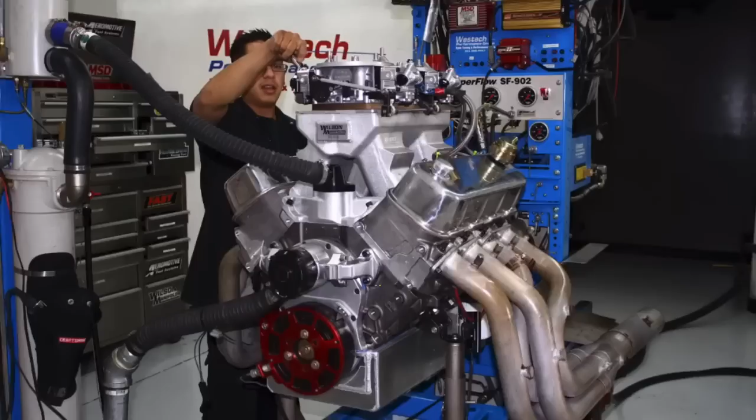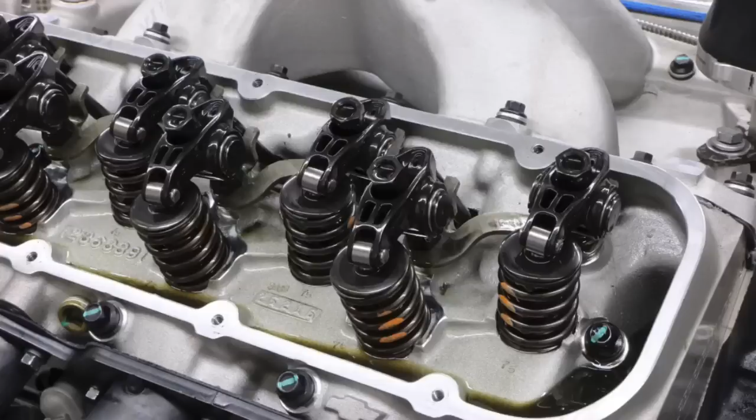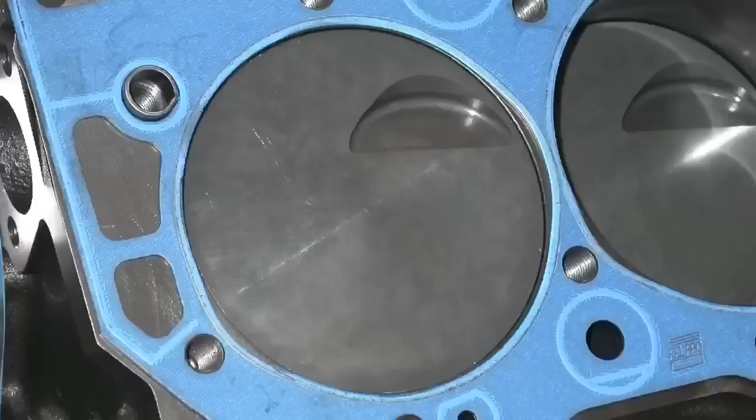Today we're going to take a look at three different 800 horsepower big block Chevy combos, starting off with a low compression 540 Dart SHP short block. Not only did this combination have less than 9-to-1 compression, meaning the static compression was in the 8s, it made over 800 horsepower.

In addition to showing you that combination, I'm also going to show you the test we ran on three different style tunnel rams. Now, stepping over to our next combination, let's take a look at how we take a 496 buildup, a good solid 496, and then make it a great motor by adding a little bit of nitrous.

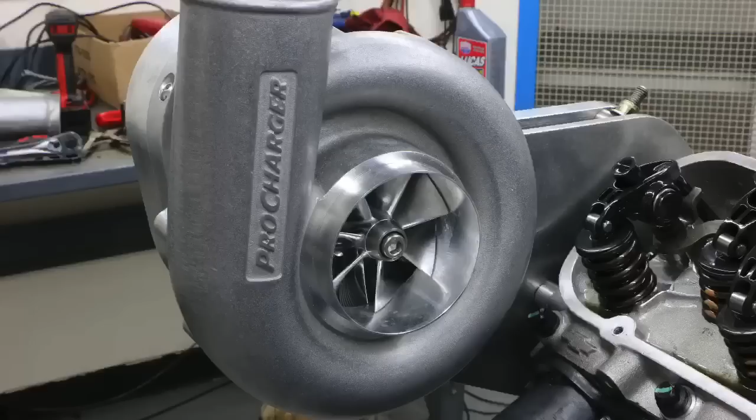The final combination, we're introducing boost. That's a 454-inch ZZ 454 crate motor from GM Performance with a Procharger. What do you think? Let's check it out.

Okay guys, we're going to jump right into our 800 horsepower big block combinations, and we started off with a naturally aspirated version, and then we'll jump into some other combinations.

Our naturally aspirated version started off at 540 cubic inches. In fact, it started off as a Dart SHP short block, forged crank, forged rods, forged pistons, and the Dart block. We're running a set of flat top pistons on this combination with valve reliefs to run much more cam timing, but the flat top piston combined with the 120cc chamber in our Dart Pro 1 CNC ported 335 heads produced a static compression ratio of less than 9-to-1, so about 8.75 to 8.8-to-1, depending on what head gasket and stuff that we use.

But fairly low compression. Despite that, we ran a fairly healthy sized solid roller camshaft in this, and this is a common misconception that you can't run these big cams with low compression. You can. They work better with more compression because compression basically adds power everywhere, but you can still work them fairly well, as we showed in this combination.

So the camshaft that we ran was a 4/7 swap big block Chevy camshaft. Just happened to have one that we had laying around basically at Westech. It was a 742/715 lift split, a 271/280 degree duration split at 112 degree lobe separation angle. And as I said, we installed the Dart Pro 1 335 CNC heads.

We had, we started off, this was a comparison of tunnel rams that we did. So we started off with a Weiand rect port tunnel ram with two 750 carburetors on it. And then we actually stepped up to a Dart tunnel ram with two dominators, and then we stepped up even more to a Wilson ported Dart tunnel ram. And so we'll show the combination of all of those.

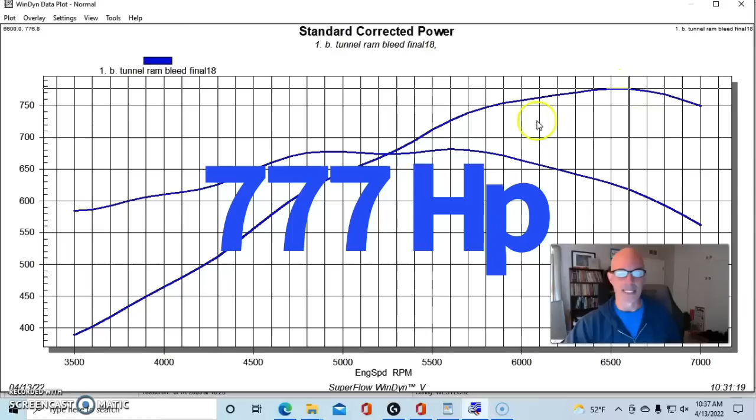So we ran with the Weiand tunnel ram and the two Holley 4150 carburetors on this. This combination produced actually less than 800 horsepower, 777 horsepower, and 681 foot-pounds.

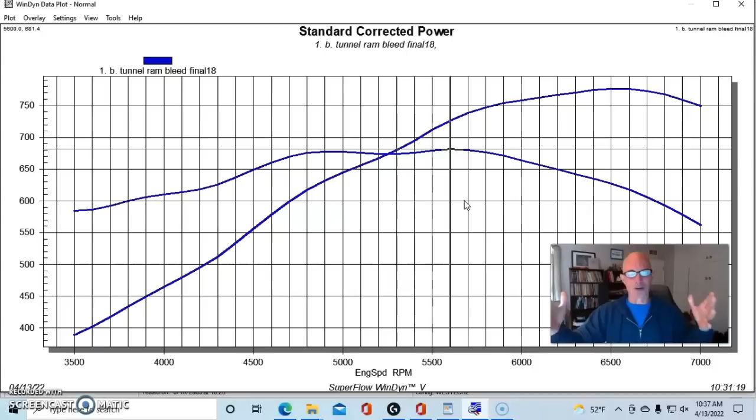And here's what would happen when we replaced the Weiand tunnel ram and the two 750s with a Dart tunnel ram and two 1050 dominators, because, if you're going to have a tunnel ram on there, you got to have two dominators on there on a big block, even a low compression one like this. But here's what happened when we installed the tunnel ram.

So that pushed our power up over 800 horsepower. We were now making 806 horsepower, and peak torque was up to 695 foot-pounds. So it was doing very well, the Dart tunnel ram. You can see there's a little bit of trade-off going on as our sine wave is working there, but basically from 5,000 on out, the bigger tunnel ram and the two 1050s worked out better.

And then what we did was we took that same intake manifold, that same Dart tunnel ram, sent it over to the guys at Wilson, and they did porting on it.

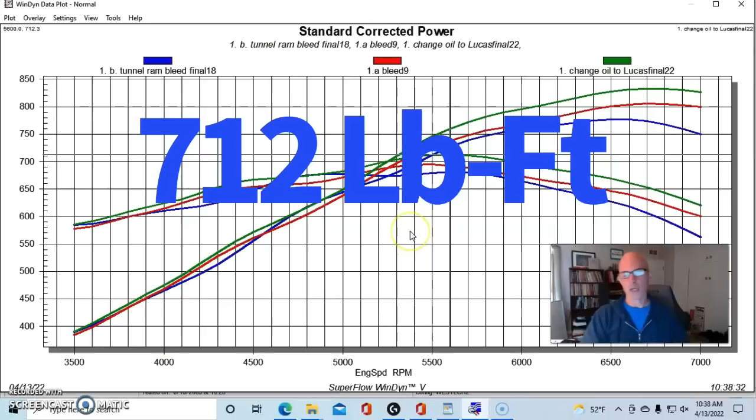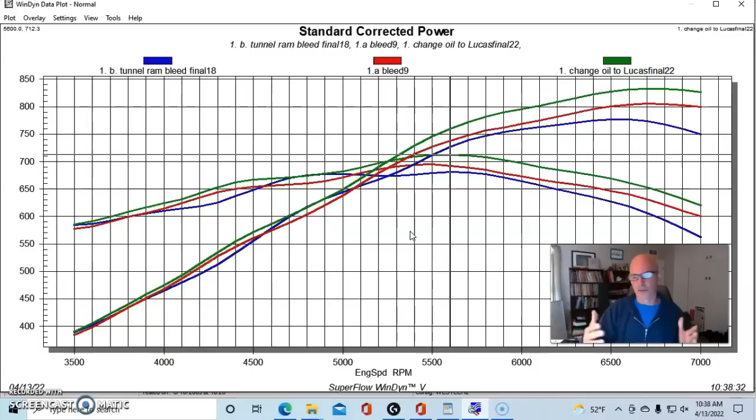And here's what happened. We picked up even more power. That pushed power up to 833 horsepower, and peak torque was up to 712 foot-pounds. So you can see there is power to be had from porting the manifold, and we still had our same twin 1050 Dominators, which was more than enough airflow to support this power level. Even at less than 9-to-1, our 540-inch big block with tunnel rams made good power. Now let's check out combination number 2.

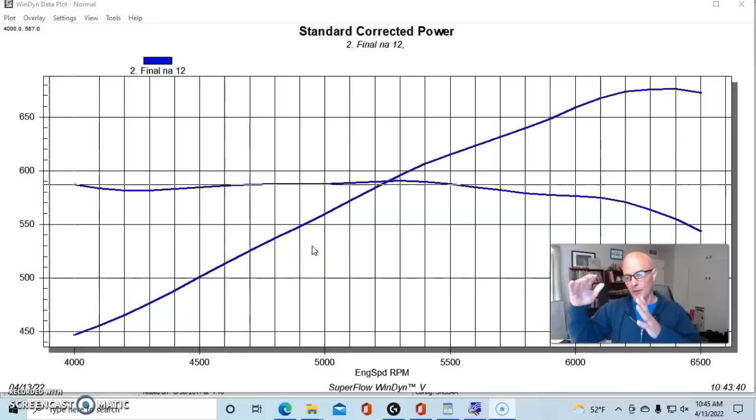Test motor number 2 was also a stroker, but not a 540-inch version, actually only a 496 using a Gen 5 block. We started off with the Gen 5 block, then added a forged Scat crank, and a combination of billet pistons and rods from CP and Carrillo. That produced a forged rotating assembly that worked out very well.

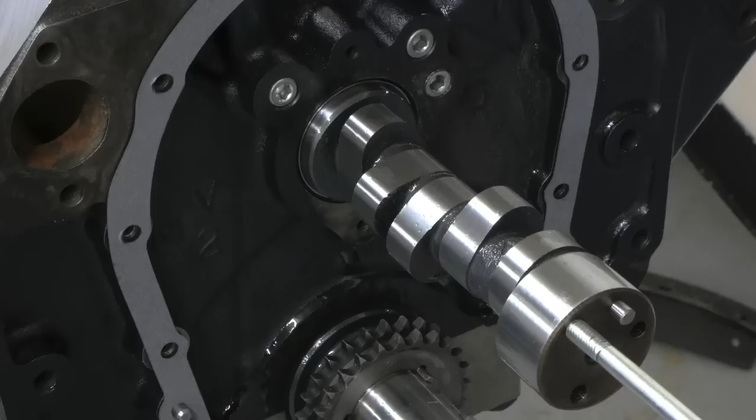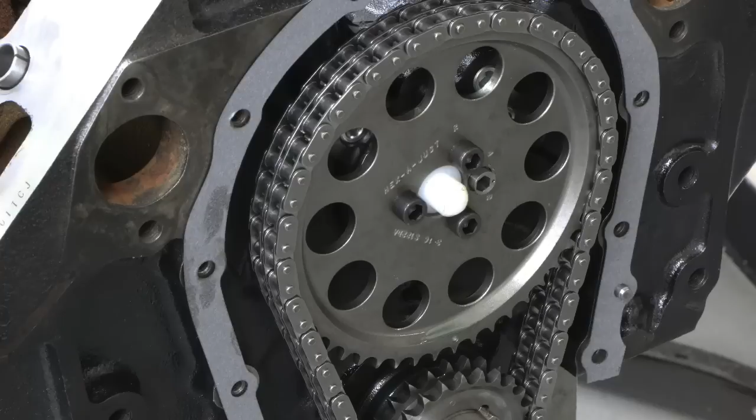We topped that with a set of ProMax CNC ported 340 big block Chevy heads. We also had a much milder camshaft in this 496 than we ran in the 540 - it was the Comp BR300-14, a 652 lift solid roller, but a fairly mild one. It was a 255, 262 degree duration, and 114 degree lobe separation angle. Comp also supplied the double roller timing chain and the solid roller lifters we used, as well as the push rods for this combination.

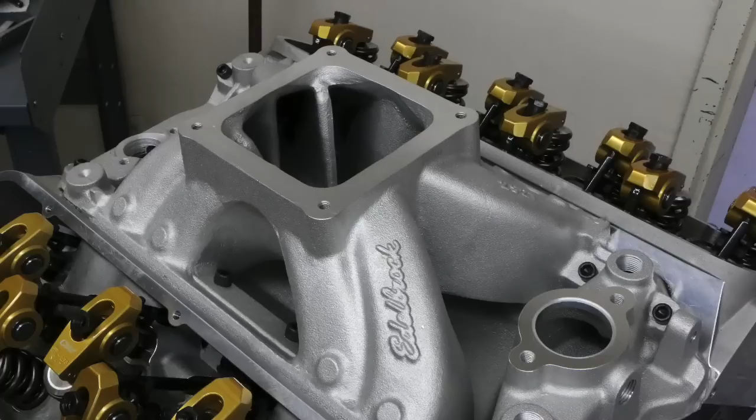This was a 4.31 by 4.25 stroke. We ran an Edelbrock Super Victor intake manifold designed for a 4500 carburetor. We installed a 1050 Dominator carburetor on this and ran an MSD distributor, our long tube headers, the Meziere electric pump, and all of that stuff.

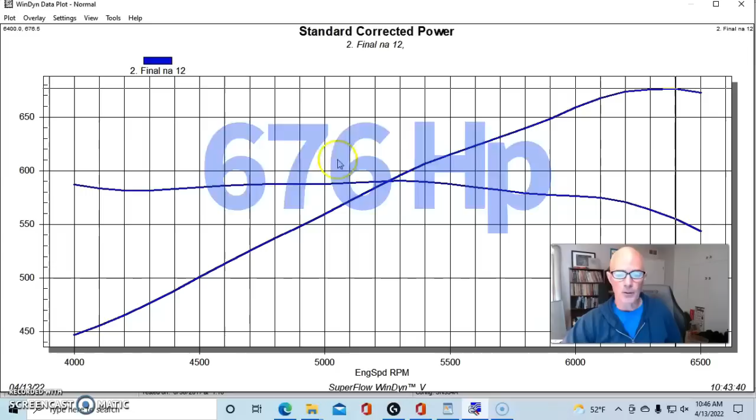Run in this manner, this motor was about 10-to-1 static compression. This thing produced 676, 677 horsepower, and peak torque checked in at 590 foot-pounds, 589.7 to be correct.

And so you might be wondering, well, how do you push this thing up over the 800 horsepower mark? Very easy. We just had a quick shot of nitrous, and here's what happened when we did that.

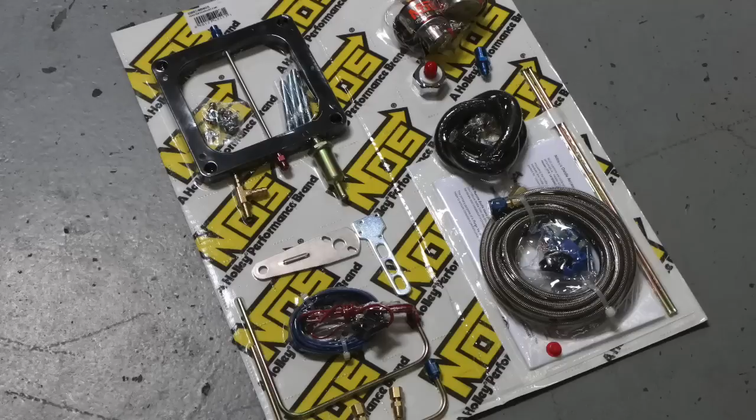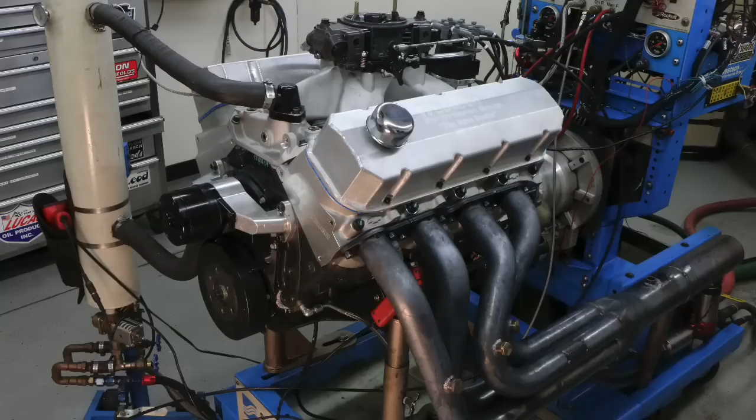Let's get to combination number 3. Our final 800 horsepower combination, naturally we had to introduce boost. So we started off with something very simple, something that's very easy to reproduce - basically a ZZ454 crate motor available from GM.

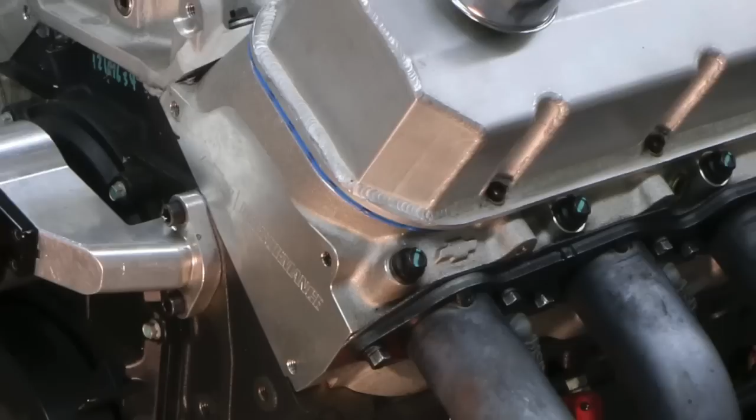Now that combination came with a 9.6-to-1 static compression ratio, so not a ton of compression, but enough to make reasonable power. It had GM aluminum oval port heads, 110 cc's.

We topped it with a Weiand Track Warrior intake manifold and a 950 Holley, an MSD distributor. We had our Meziere electric pump, and then the 2¼ inch long tube headers.

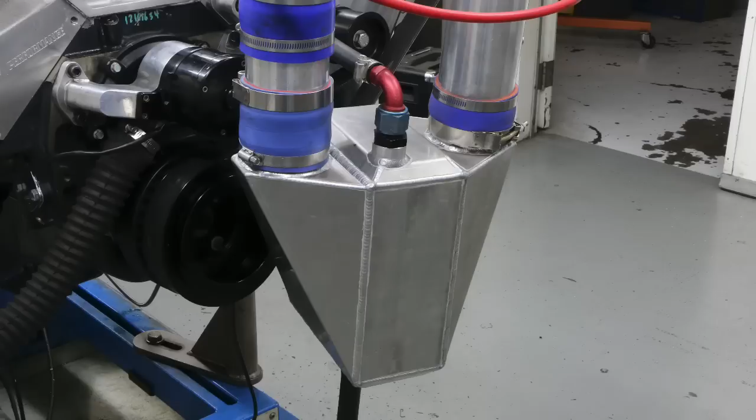We also took the liberty of removing the pan so we could drop it and weld on a bung for our supercharger system drain, because we were going to add a Procharger D1X, and we also ran a P1X on this with an air-to-water intercooler to push the power output of the naturally aspirated combination all the way up beyond the 800 horsepower mark.

We installed the camshaft, which was a Comp Extreme Energy, with a 521/540 lift split, a 236/242 degree duration split, and a 110 degree lobe separation angle.

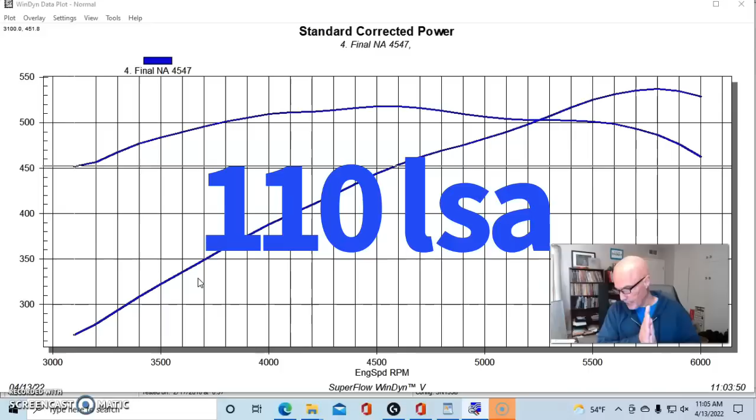When we ran this naturally aspirated, before adding the supercharger, we used a 950 Holley, and it produced 538 horsepower and 518 foot-pounds of torque.

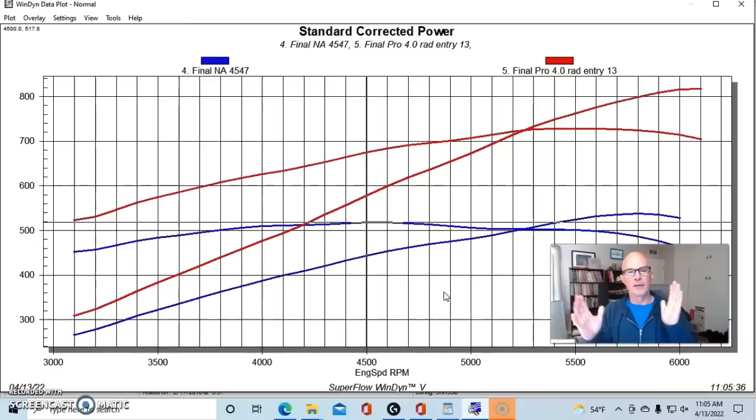But here's what happened when we installed the Procharger. This one was with a D1X Procharger centrifugal supercharger. We also added a radius entry feeding the blower to improve airflow—I'll show you a photo. We had a 4-inch blower pulley and a 7.5-inch crank pulley on this, and we also installed the air-to-water intercooler.

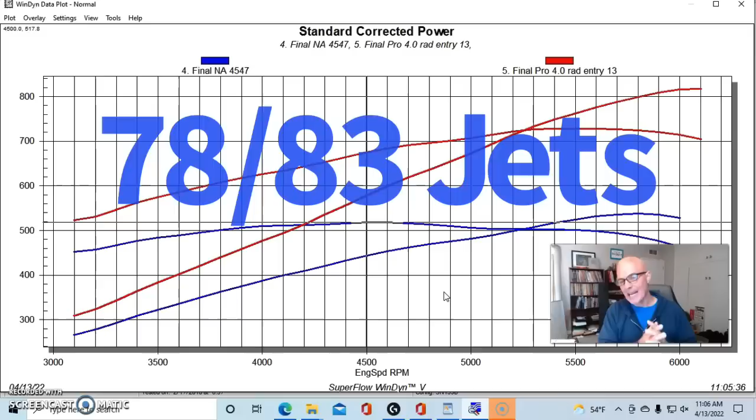We swapped out the 950 Holley HP carburetor and installed the carburetor we run on most of these blow-through applications, a CSU 850 blow-through carburetor, for guys interested in starting their own setup. We had this set up with a 78-83 jet split front to back, and we had a half turn out on both of the boost reference power valves on the CSU carburetor, since those are adjustable.

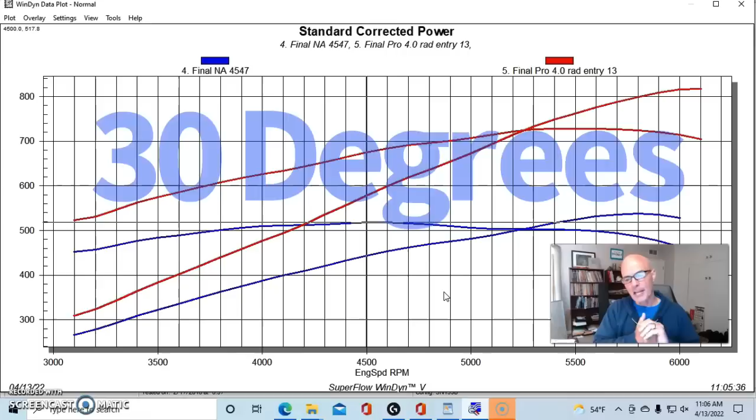We were running 30 degrees of timing, and we ran a mixture of 91 and 100 octane just to make sure we had a safety margin. This particular motor had belonged to one of the editors of the magazine, so we wanted to make sure nothing got hurt on it—that's why we put a little extra octane in there.

So run with the Procharger, the intercooled Procharger blowing through the CSU carburetor, this pushed our power output up over the 800 mark to 818 horsepower. Peak torque was 728 foot-pounds. You can see the blower adds a ton of power. It produced a peak of 7.8 pounds of boost, so very low boost in actuality.

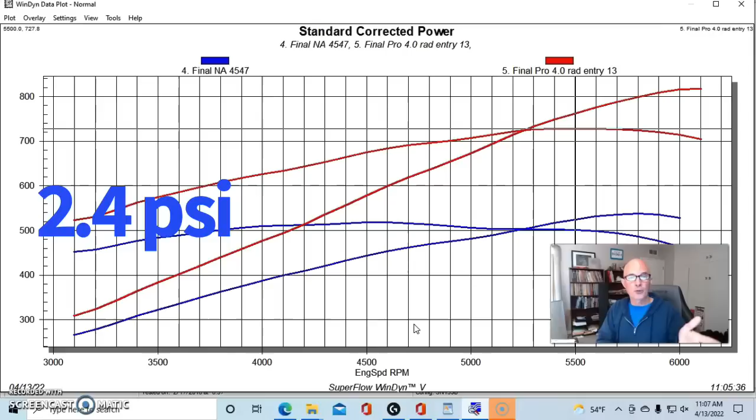You probably could run this thing on pump gas without any problem. Boost pressure started out at about 2.4 pounds down near 3,000 RPM, and as I said, went up to a peak of 7.8 pounds on this combination. So there you go: crate motor, decent cam, carburetor, good blower, and away you go.

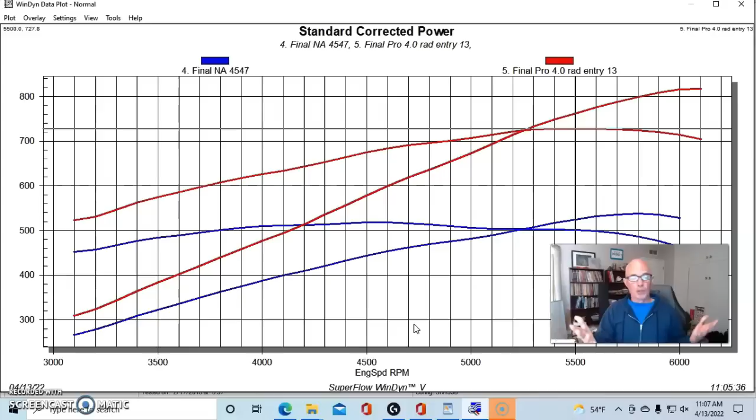Let's get to our conclusion. Okay guys, what's the takeaway from this video on 800 horsepower big block Chevy combinations? We learned that even on a naturally aspirated 540-inch motor saddled with 8.7 to 1 compression, we can still easily exceed 800 horsepower with the right tunnel ram combination. It makes me wonder what this combination would have done if, instead of less than 9 to 1, we'd had 12 or 13 or even 14 to 1 compression.

Now stepping over to nitrous—it's just kind of the great equalizer. We can take a really good 496 combination like we put together and make it a great combination with just the push of a button. Nitrous, always awesome. Now boost, definitely high on the list. In this case, a Procharger on a very average and mundane ZZ454 crate motor. All we had to do was add the Procharger to it, and that took an average motor and made it extraordinary.